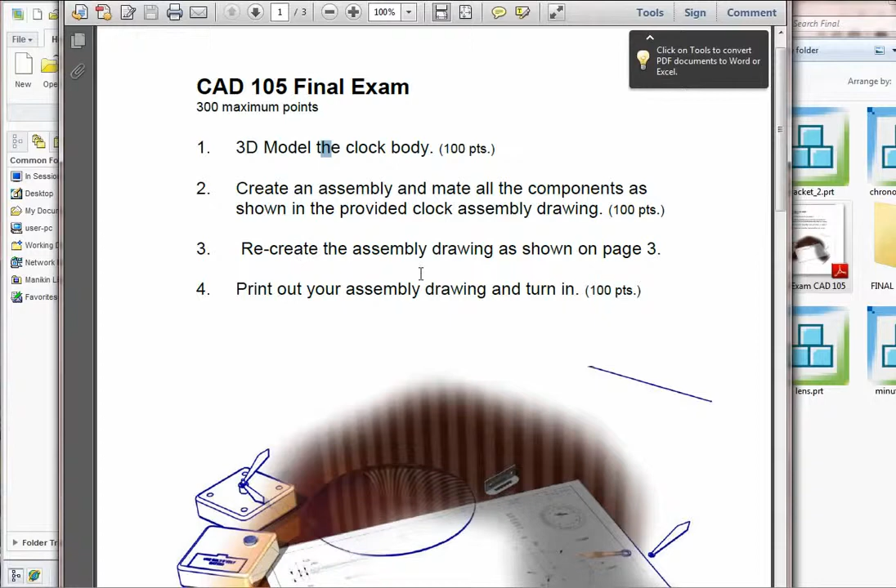The instructions are to model the 3D clock body with all points, create an assembly with all the components as shown, and recreate the assembly drawing shown on page 3. Print it out and turn it in. Here is the clock body. You can see it's a little more detailed than what we worked on in the past with our midterm, but nonetheless it's not much more challenging. There's just a couple extra things to do here. So we'll begin with that, then assemble it as shown and make this drawing.

So to start off, let's go ahead and create the clock body. The outer diameter is 8 inches, and it's going to be 0.75, so 3/4 of an inch thick. It'll have a hole that's a 1/2 inch diameter through in the center. Start with a new part, and we'll call this the clock_body.

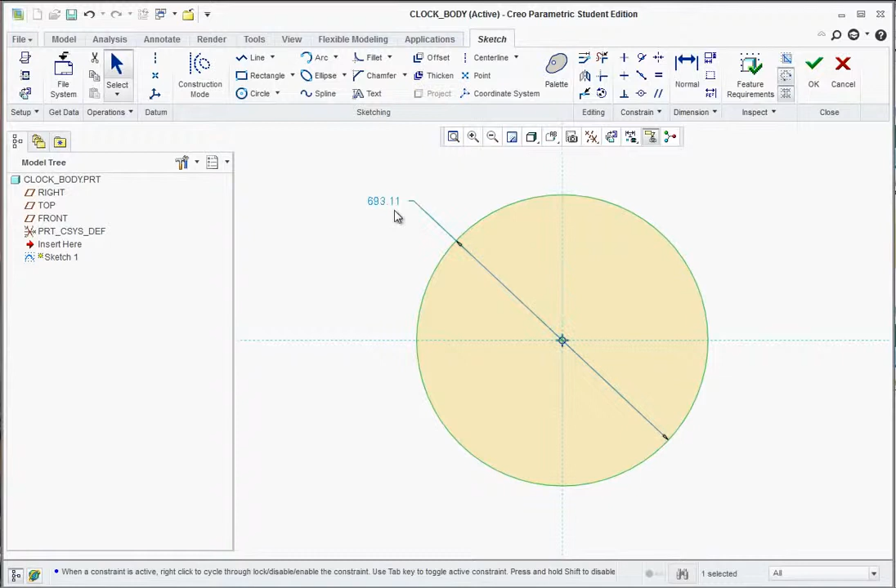Hit OK. Select the front plane for this one and start a sketch. Go to the front view orientation and proceed to sketch 2 circles. Go to the center and point circle. Draw out a large diameter there, and that's going to be 8 inches. Then draw a smaller diameter in the center, which is just 0.5.

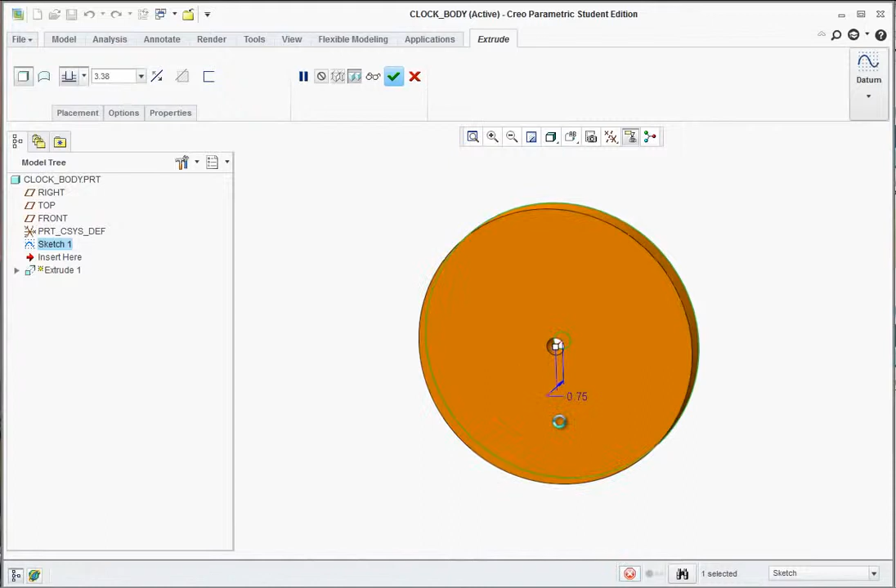Now you can extrude that, so hit OK. Go to Extrude Boss, refit here, and it only gets extruded 0.75 deep. Hit Apply. Right away, it's a good idea to put the fillet on, or the round. Click on the round, and the round is going to be 0.25. Select the outer edge, and apply.

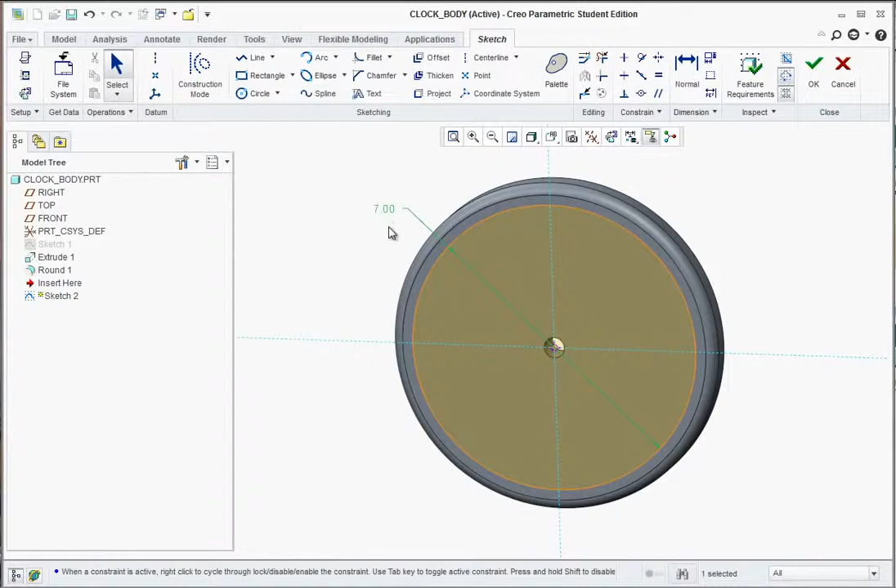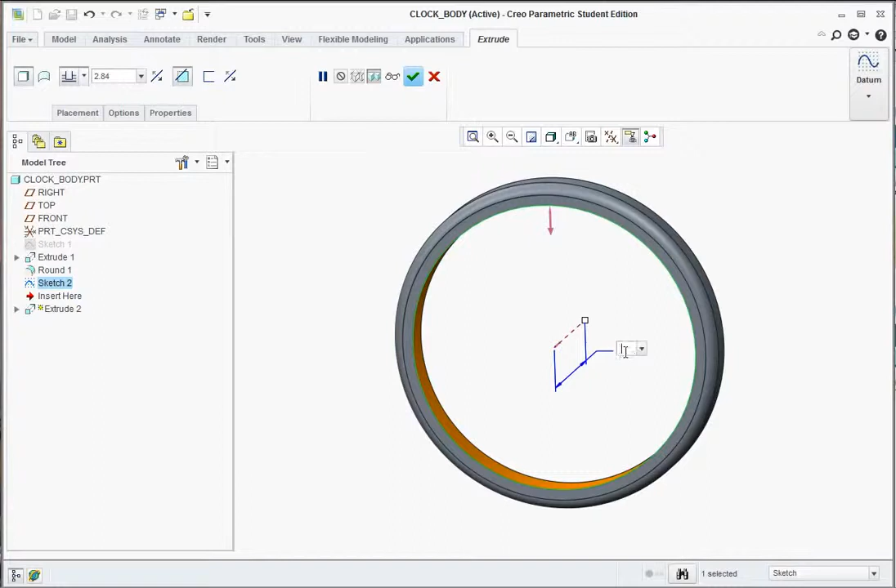Now select this face on the front and start a sketch. Draw the next diameter, which is 7 inches. That gets extruded as a cut. If we go to Extrude, reverse it, and we'll have to look at the print for that, and the print identifies it as 0.125 deep. So 0.125, and remove material. Let's try to get 0.125, hit enter, and have it update. And the green check mark to apply.

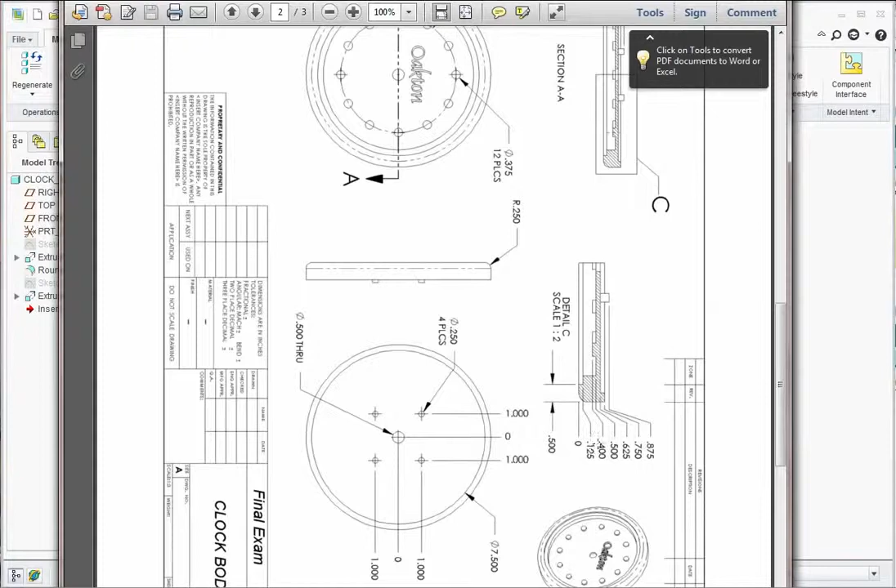The next diameter we're going to create here is going to be 6.5 inches. It's going to be another depth. In this case, from the 0 marker, which is the very front face, it's going to be 1/2 inch deep. Make sure it'll be 0.375 in the event that you have to subtract 0.125. To make things simple, I'm just going to go to Sketch and sketch on this little ledge right here, and draw my next circle, 6.5 from the center.

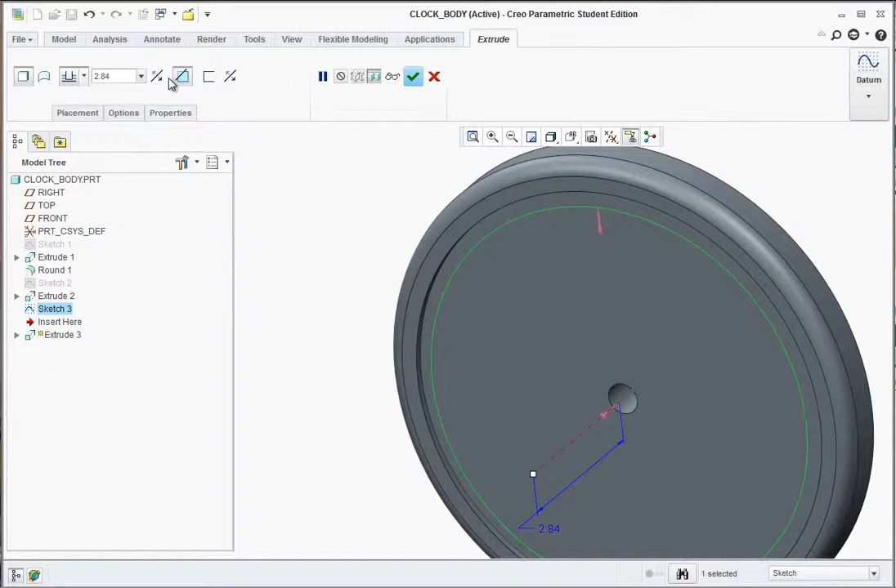Go to OK. Extrude. Remove material. Flip the direction. You could do that here. That goes 0.5 deep from this front face, remember. If you're sketching from the recess that's on there, subtract 0.125 from it. And hit Apply.

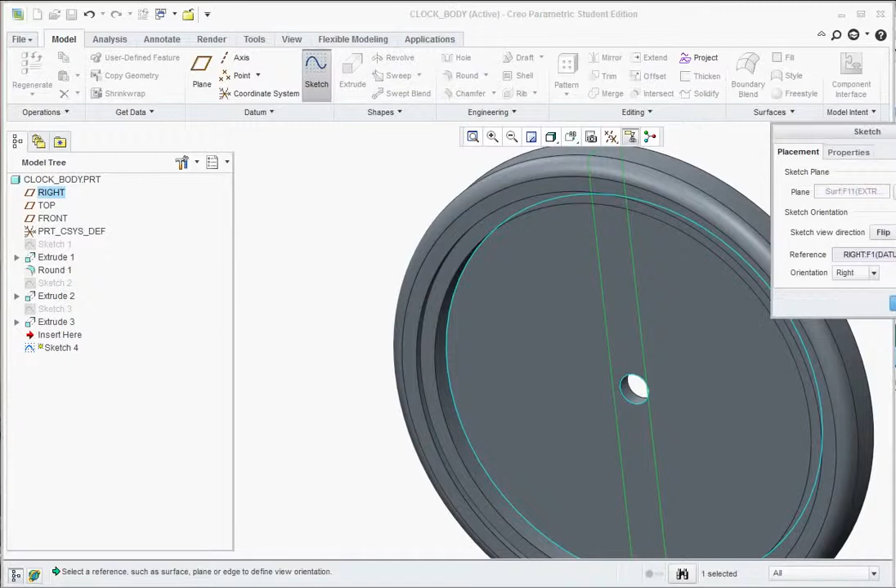Now we could go ahead and select Sketch and draw on this surface. I'm going to go to normal to the front, and draw a circle at the 12 o'clock marker. That's going to be 0.375 diameter, and it's going to be offset 2.5 inches from the center. Now you can hit OK and extrude that. It gets extruded only 0.1.

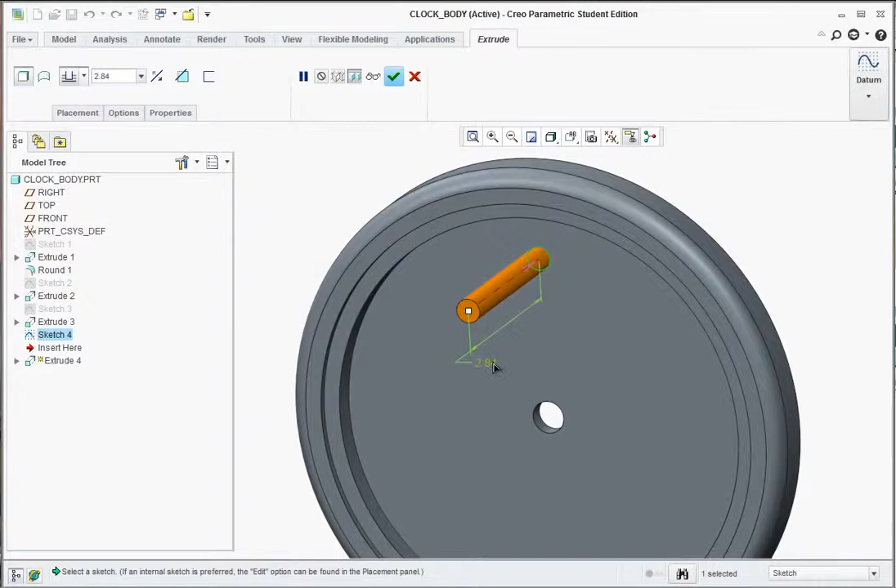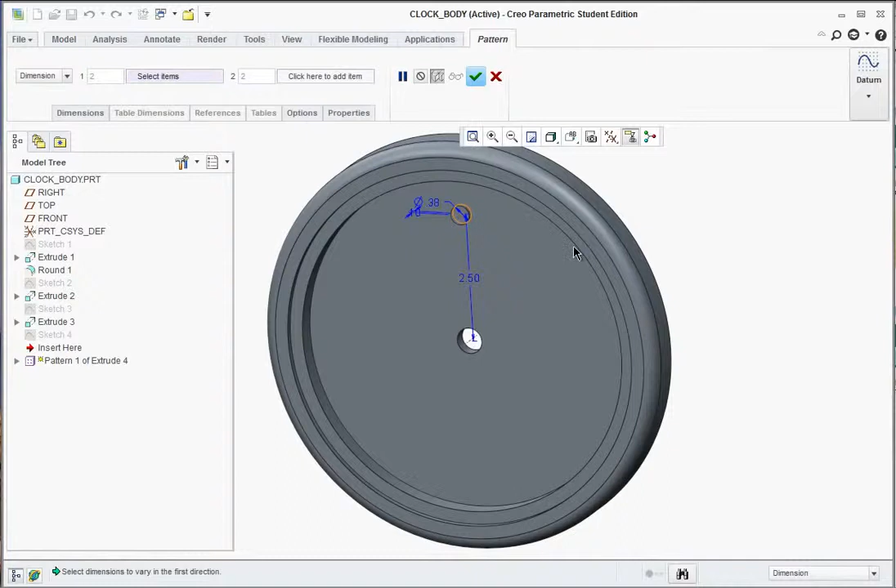Now we need to make the circular pattern. You're going to have to turn on your axis display. Now you could select this feature here and go to the pattern. Make sure that's selected. Go to pattern here and select pattern. Over on the upper left, make sure it's select axis, and select that center axis. There's going to be 12 markers, so it's 360 divided by 12. Hit enter, and it gives you 30 degrees. Hit the green check mark and apply.

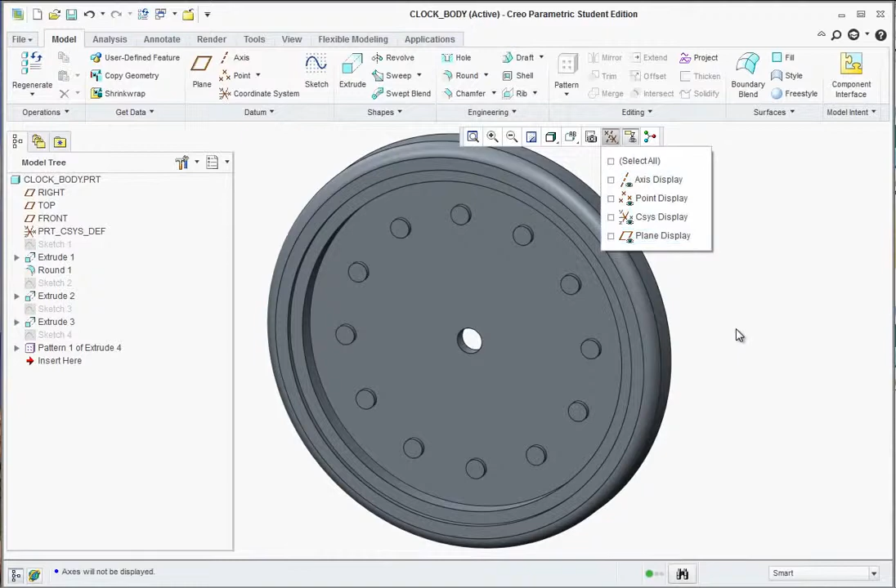At this point you can turn off the axis display. So now the front of the clock's done. Now the back needs to be addressed. For the back of the clock, we can see it's going to be 7.5 diameter, and it's just going to be 0.125 cut depth.

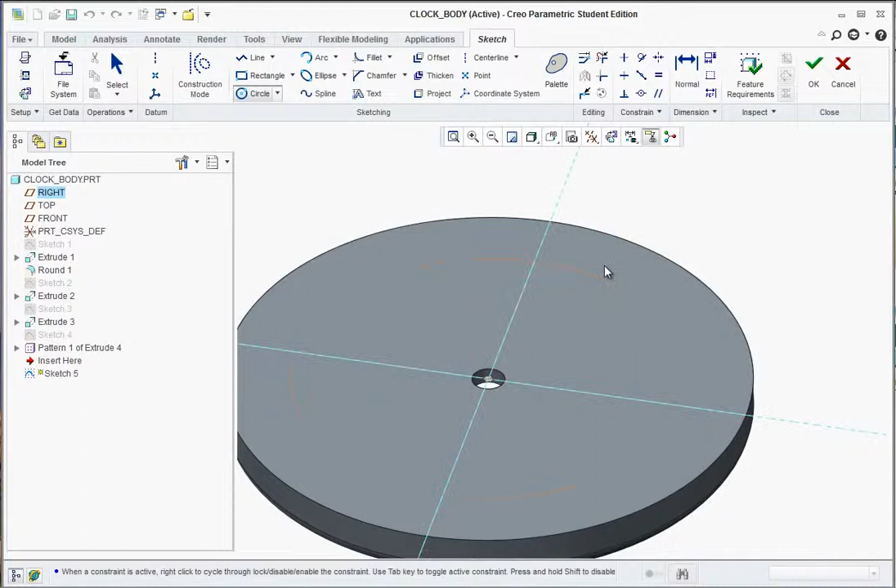So select sketch and select this back face. Start your sketch and draw the next circle at the center, and make that 7.5. Go to OK and extrude, reverse it, remove material, and make sure this is set to 0.125 deep. Hit apply. If it cuts through, that's an indication that you have one of your depths off.

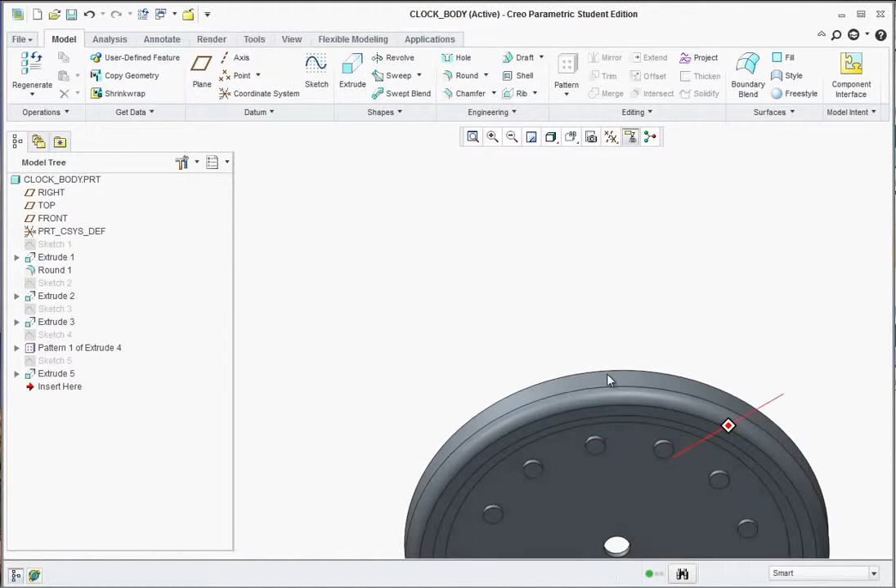Most likely it's that 1/2 inch deep for this level here, which you'd have to fix the extrude to by editing the definition of it and change it to 0.375 most likely. Now we need to select this face again and start a sketch on that pocket, that recess. I'm going to rotate here, and I'm going to select the centerline tool, draw off a vertical and a horizontal centerline. Draw a circle between those two and make it 0.25 for the diameter and 1 inch off each edge.

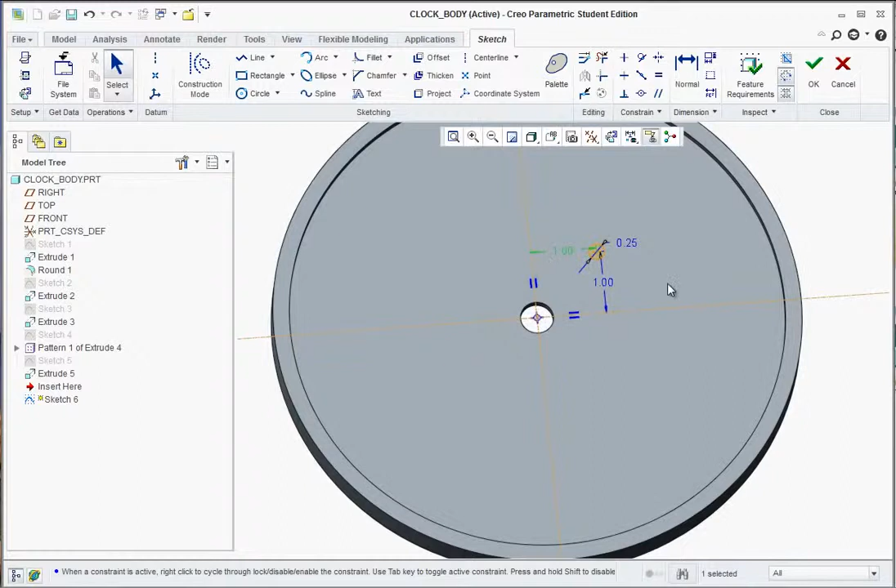Extrude that, go to OK, go to extrude, and that gets extruded 0.25 high.

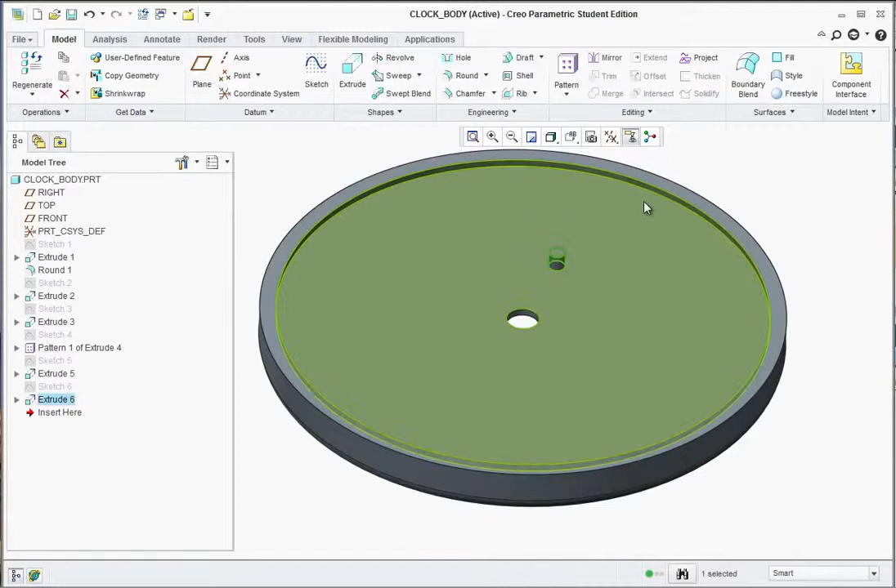Now we want to mirror that across. We could have used a sketch mirror as well, that would have been pretty easy. In this case, we just select the post, go to mirror, and you could select your right plane as a mirror plane and hit apply.

Click on both posts holding control. Unfortunately, let's just do one at a time. Let's see if we could just select the mirror. Go to pattern, not pattern, cancel out there.

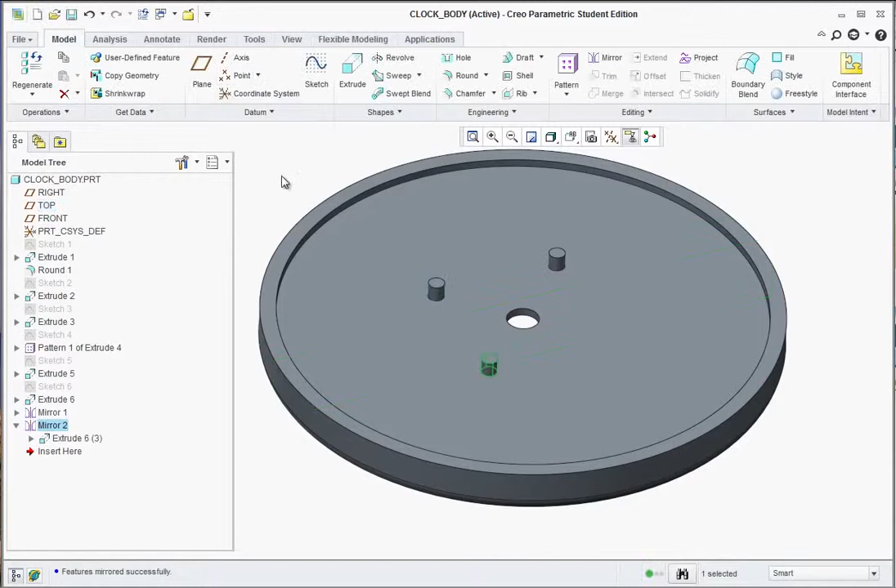Go to mirror and select the top plane. Mirror across. It's going to make us do this each one at a time unless we group them. But I'll go ahead and select extrude one there, or this one here. Go to mirror and I'll select the top plane for that one.

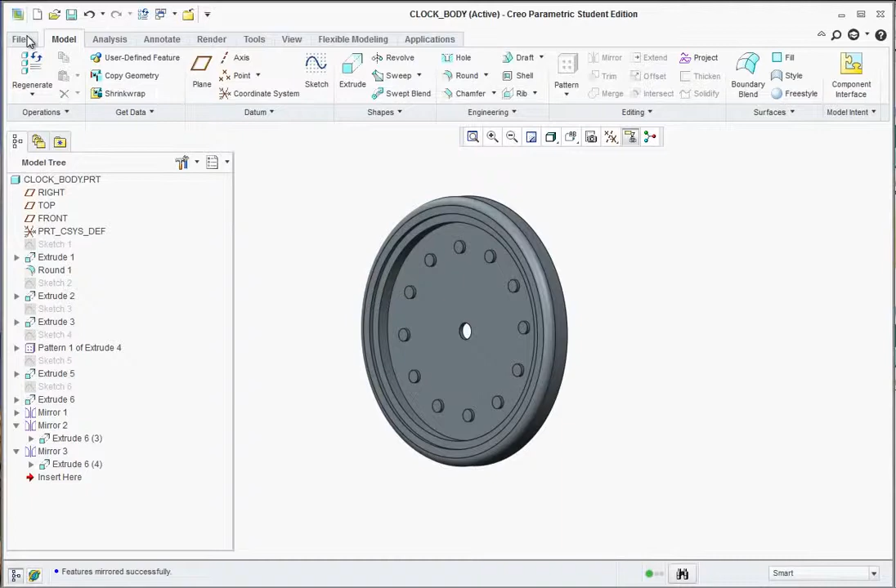Apply. Alright, the clock body is done. Let's move on to the next part, or the assembly I should say. Go to File, New, Assembly, and call it Clock. Hit OK.

Just going to refit this to the screen there. And now we're going to go to Assemble, and we should be able to see the clock we've been working on. It should be found in Session. Click on In Session and find the clock body. Hit Open and set that to default. Hit the green check mark.

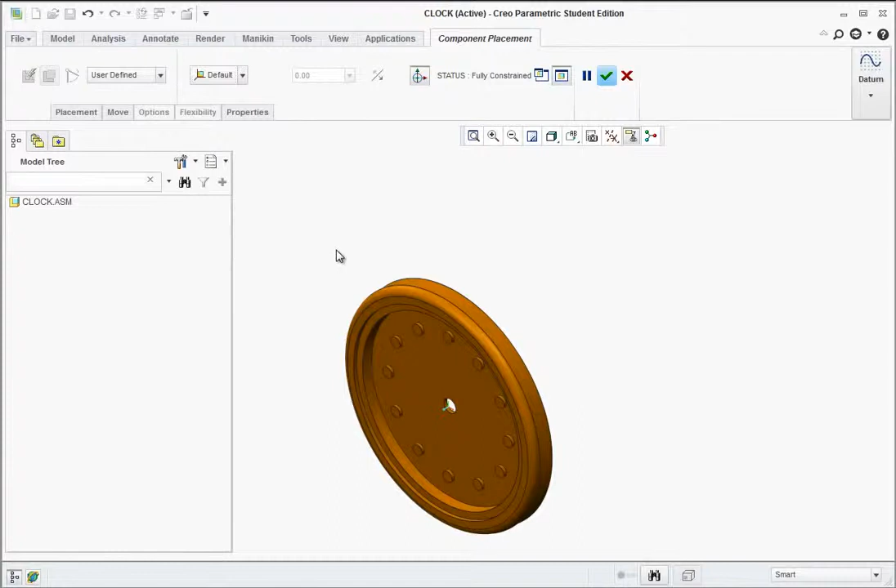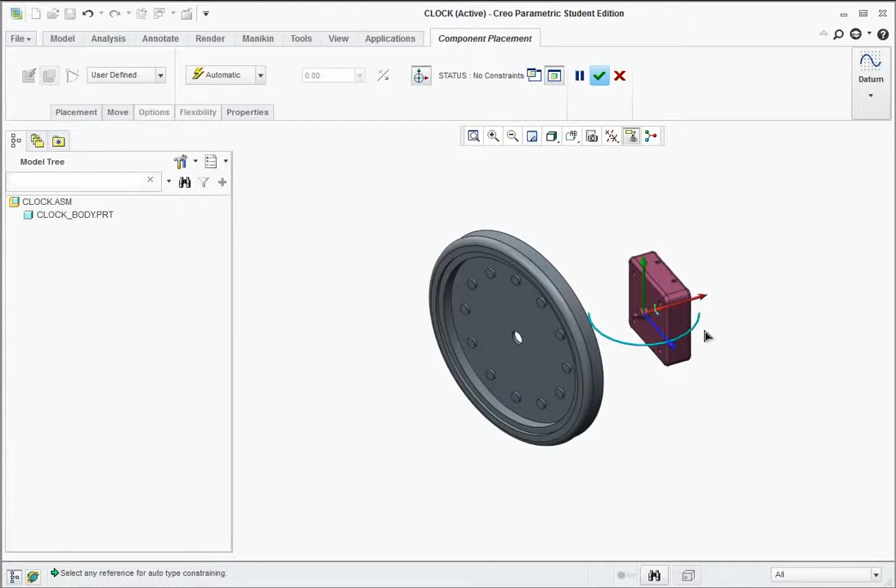Now we need to assemble the other components. So go to Assemble again, and this is where you're going to have to browse for the sample files and Final folder and find the chrono housing. Hit Open. Now using this, you could grab these manipulator handles and get it close and even rotate this around so you kind of have it in position ahead of time.

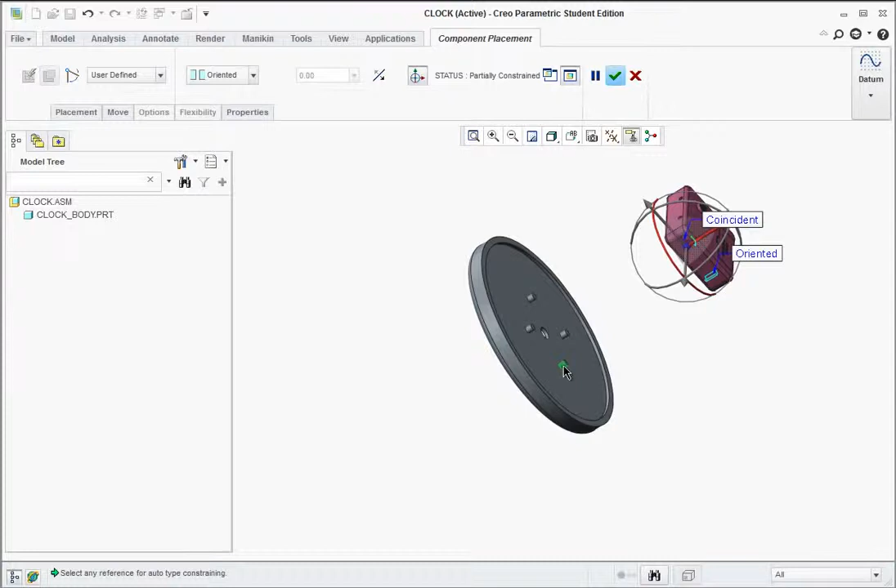And now you could select this cylindrical face here to this hole. Align that. Then this face here, hit refit if you have problems with rotating out of the screen. And then to that post on the lower right. And then keep having to rotate. Unfortunately, it's not refitting very well here.

I'm going to select this face to select that face. Now, instead of distance, I want that to go coincident. So let's mate up against there. Let's go to the standard orientation here.

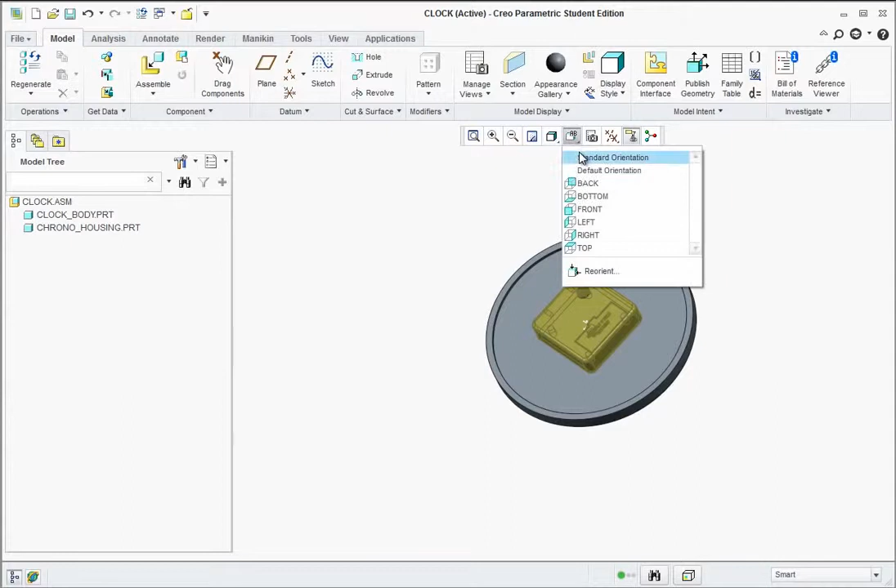Okay, now we could go ahead and make sure that the post holes are on the top, so you're in good shape, and you can continue adding components. So go to Assemble, let's bring in the bracket, hit Open, and again, we can move this to the back where it needs to be.

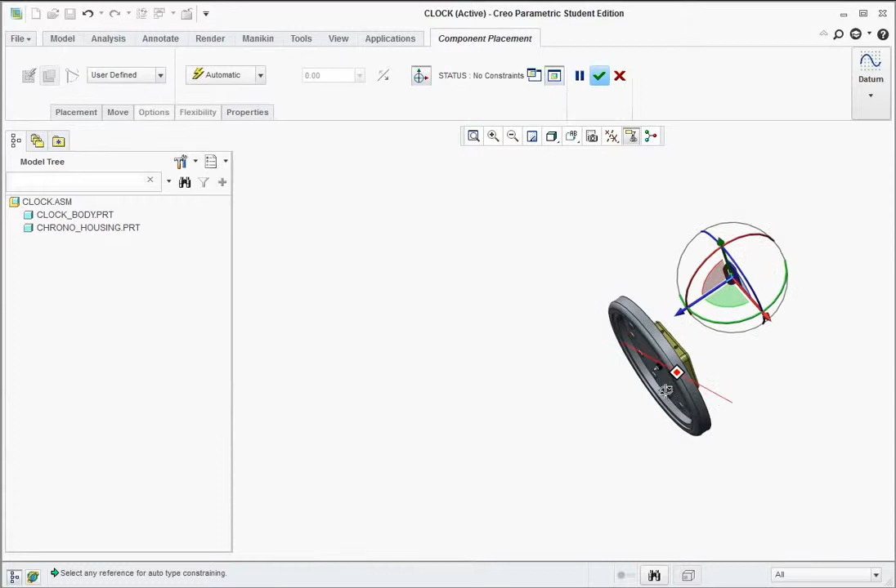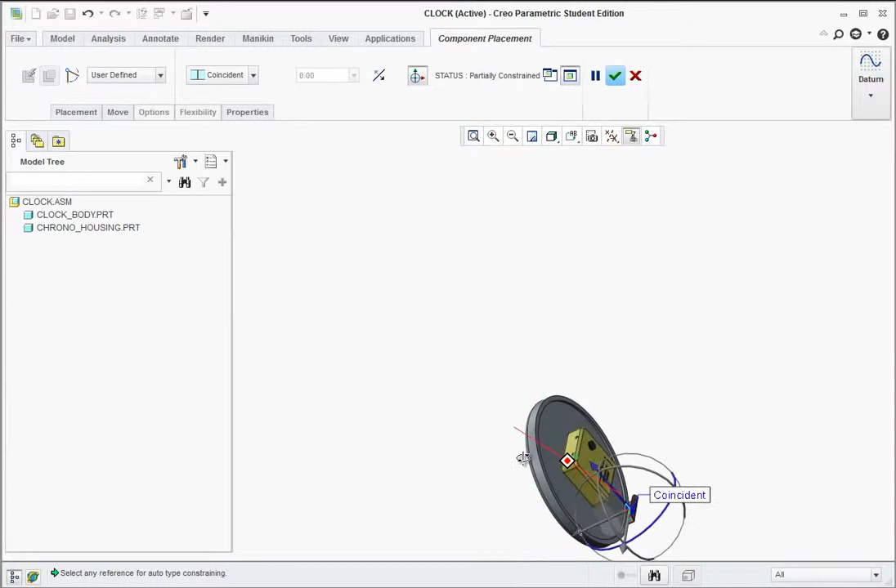Okay, and I'm going to go ahead and rotate it around, grabbing the little rings to get it kind of close to the same way I need to have it over there. And I could select this face here to this face. Now if it's in the part there, we could just grab the manipulator handle, drag it up, and zoom up, and now we could select the underside face and align it to this face.

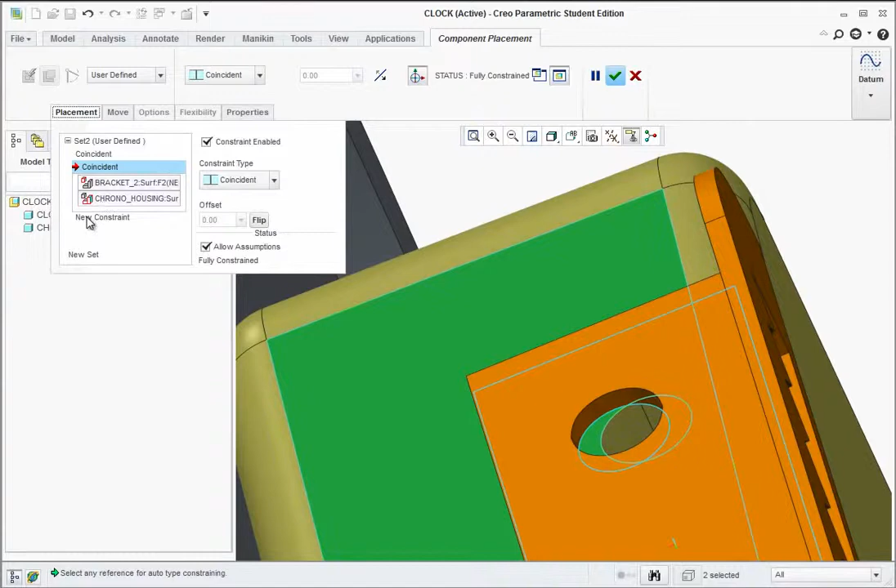And finally, this hole, oops, unfortunately grabbed the wrong face. Let's go over to placement. Let's go to new constraint, this face to this face, and apply.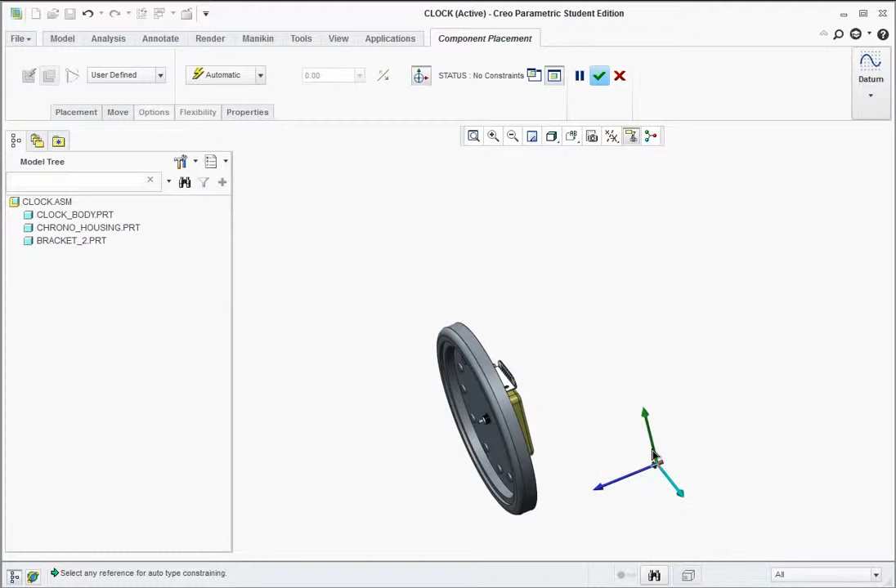At this point, we're going to go back to assemble, and we're going to bring in the bolt. Open, and move the bolt over. Close in proximity to the hole. Now we can select the length of the bolt. And actually, we'll rotate it somewhat closer into position, and then select that hole there.

Okay, we've got to bring it up. Now rotate this around, select that underside face of the head of the bolt to connect to this top face here, and hit apply.

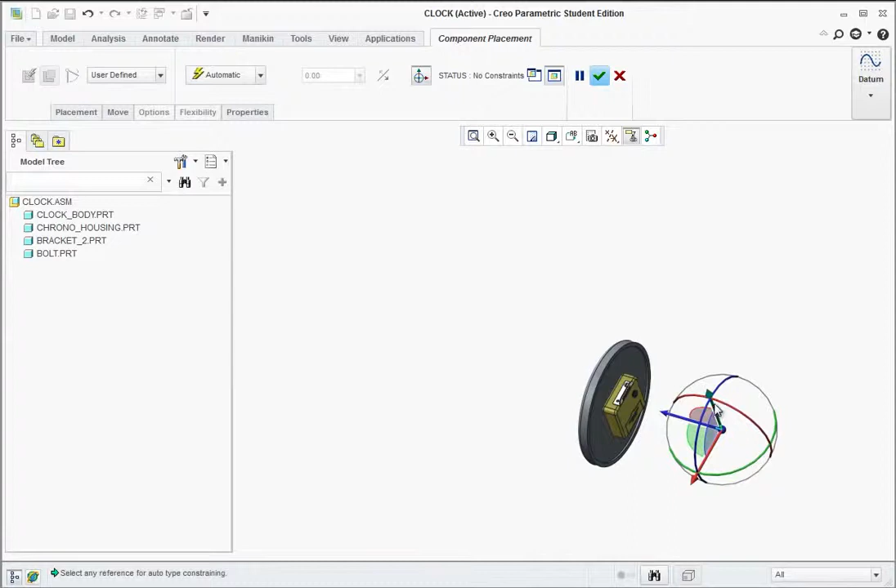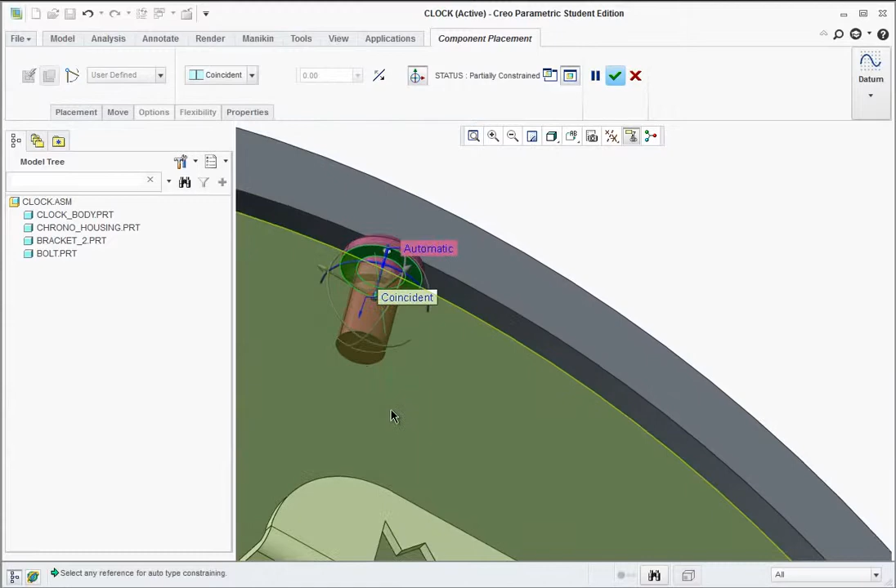Let's bring in another bolt. Assemble, bolt, hit open. Again, get that close in proximity to the assembly and where you want to drop it. Rotate it. Select the length of the shaft to the hole. Get underneath that surface to this top surface of the bracket. Hit apply.

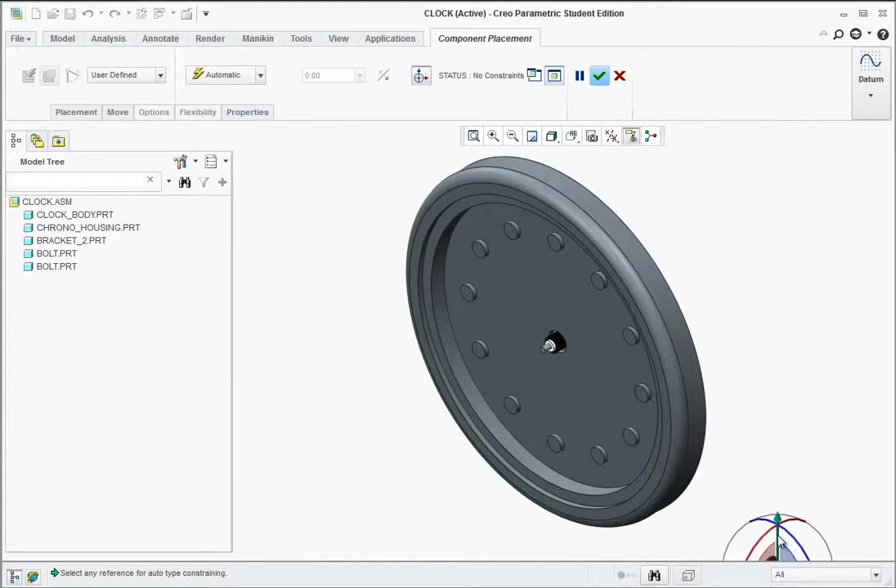Go back to default orientation, and now we'll bring in some of the other components. Assemble, and let's bring in the hour hand. Could rotate that a little bit. Bring that up. And same thing: select the hole here, and then select the white sleeve.

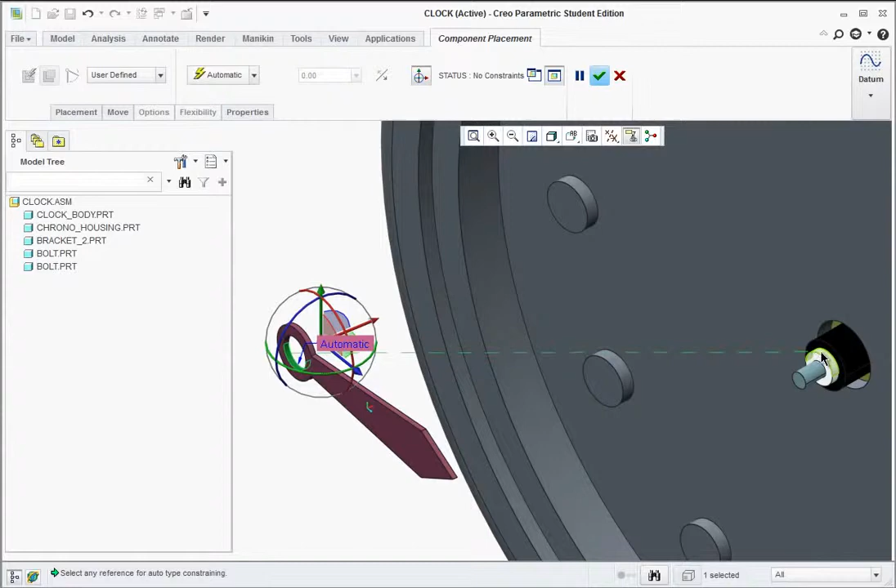And then you can select this backside face. Remember, you could drag it out if you need to. And then the black sleeve surface here on the flat one. Apply. Proceed to bring in the minute hand now.

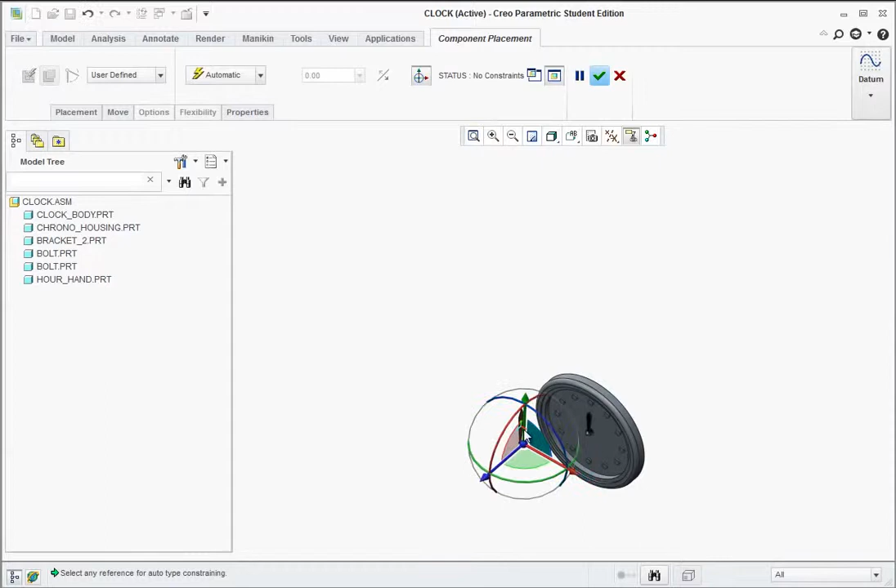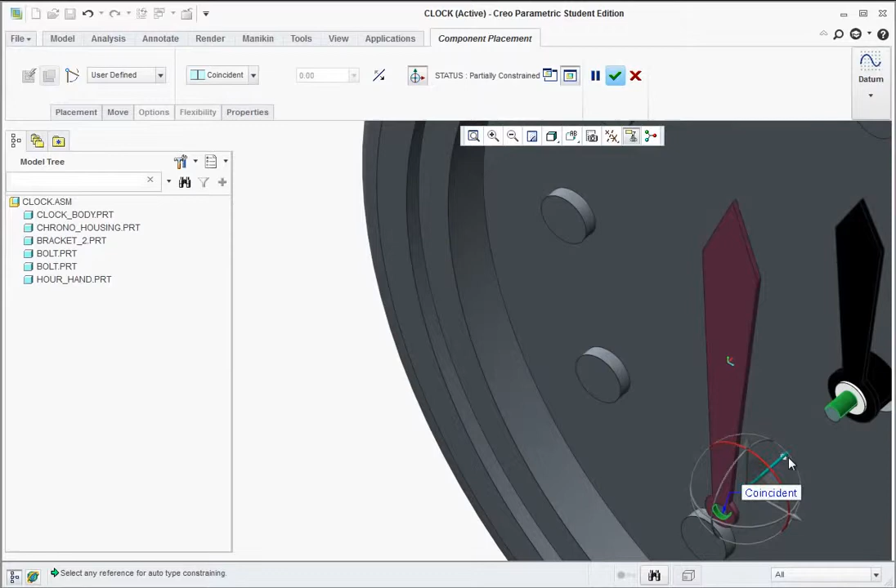Again, get it close. Rotate it around a little bit. Select the hole and select the gray sleeve. Let's drag this out a little bit, and maybe out a little bit further, so we could rotate and get that backside surface.

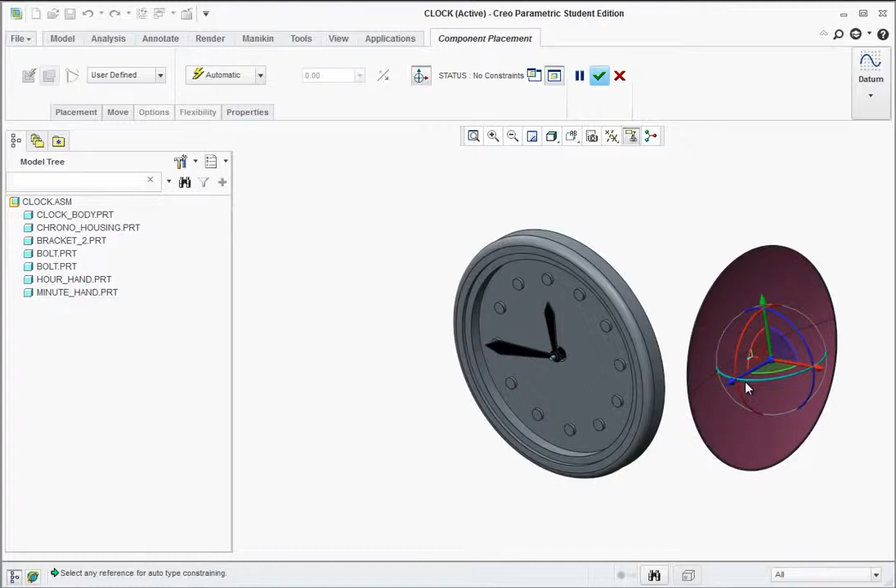And we want that to go coincident to the white surface. Hit apply. And now for the lens. Assemble, find the lens, bring that over here. Rotate it around a bit.

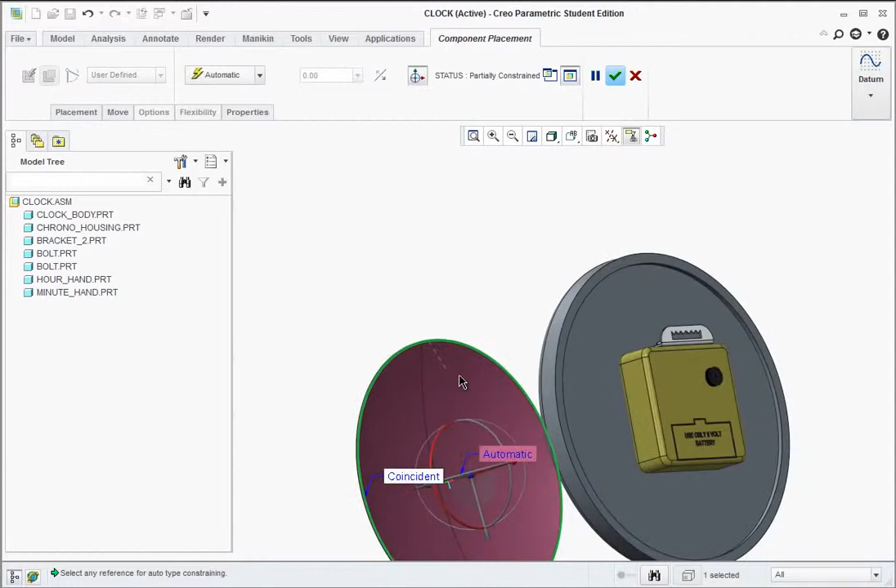Select the cylindrical face of the lens to this face here, and then this flat face to the flat face on the ledge. Make sure that's coincident.

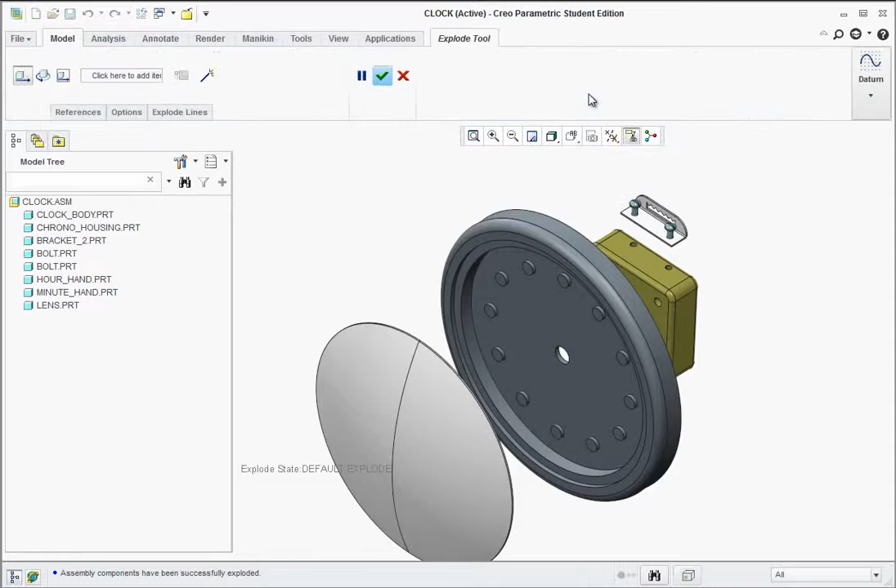Now we're going to explode this. For explode, it's right up here. Click on Explode View, and then down below there's Edit Position. Click on Edit Position, then select the part you want to move, and it gives you a manipulator handle so you can drag it in any direction. If you want to select more than one object, hold Control and drag them out as a group.

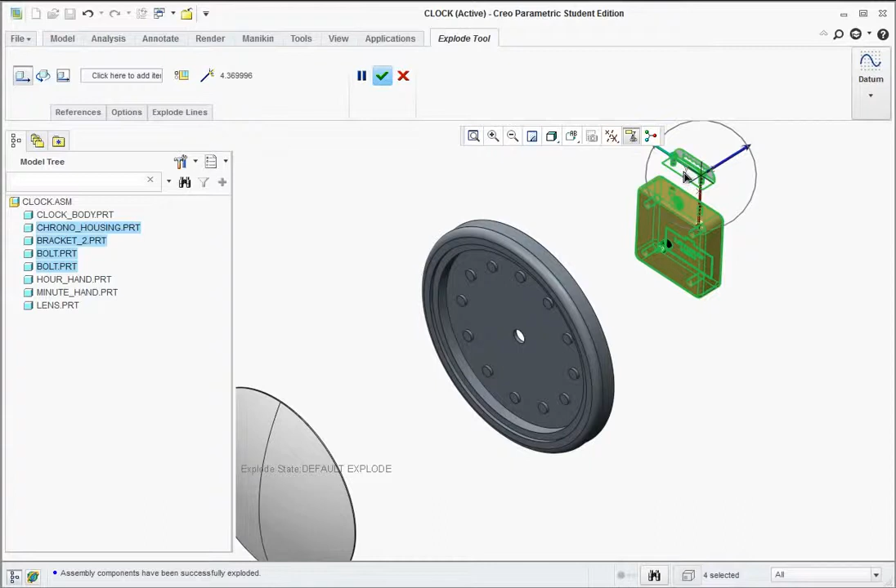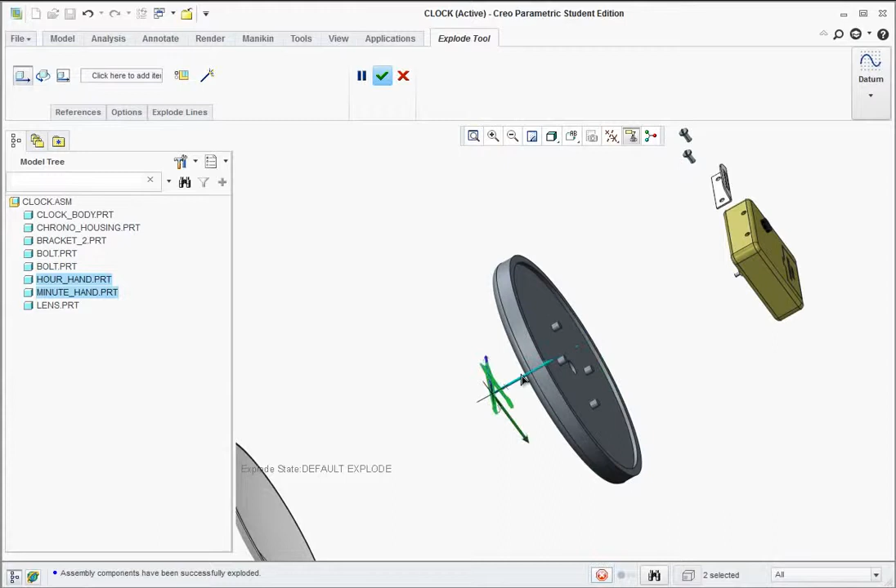Drag that up, click on the bracket and drag it down, and make sure you bring out the hour and minute hands. Move those out and then split them up so they're not touching.

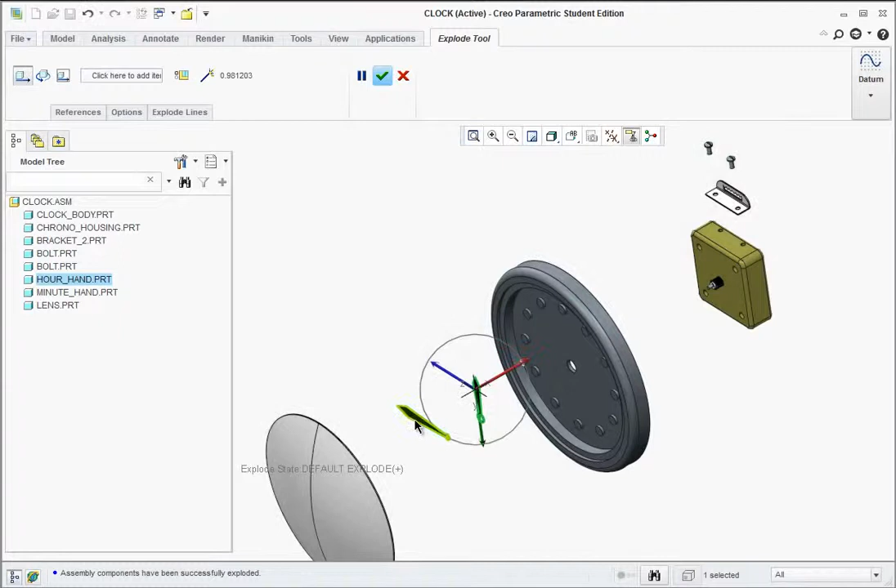Then you could click Unexplode View by clicking on Explode View again. Okay, so the assembly's done. That's worth 100 points, so we're on the last leg of this.

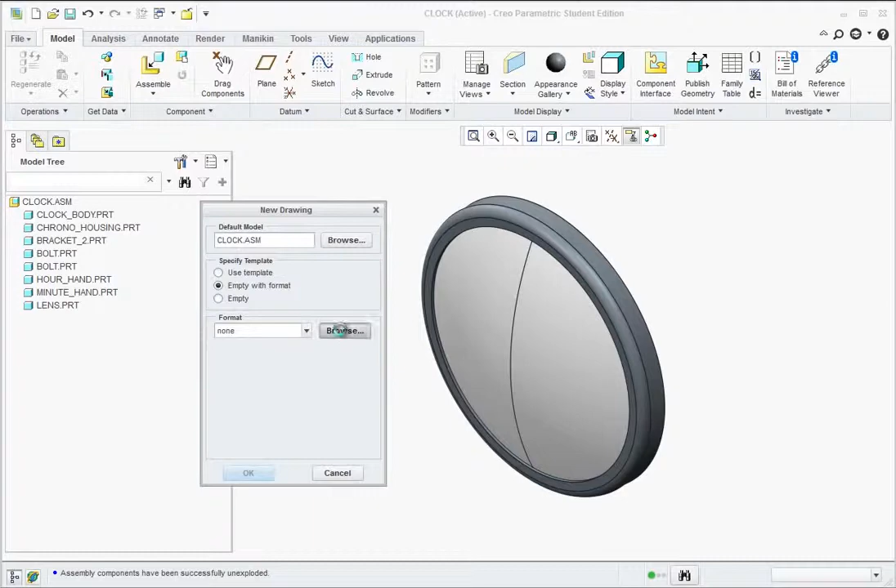Let's go to File, New, Drawing. Call this the clock, hit OK. You could go with Empty with Format and browse for the A format.

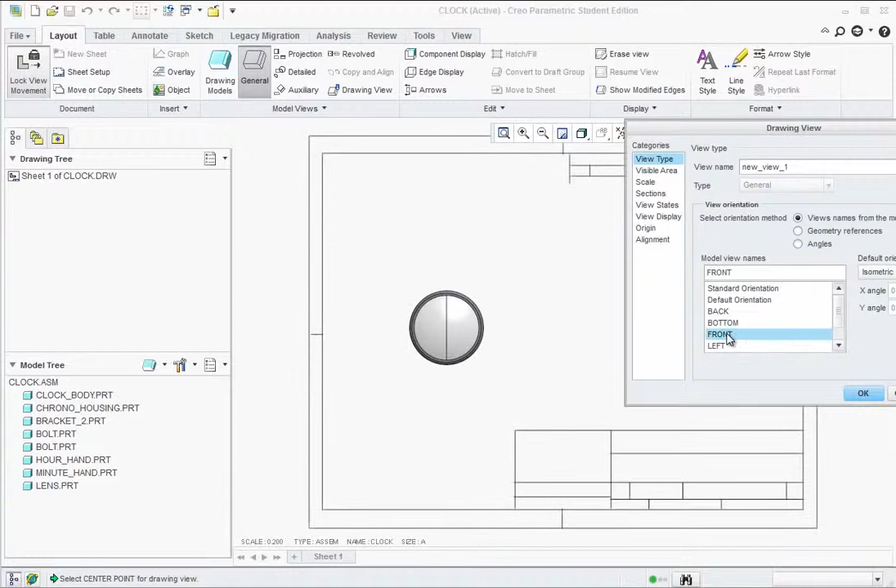At this point, go to General, hit OK, left click to drop in the clock, and let's bring in the front view orientation. Under View Display, make sure No Hidden with Phantom Lines for the tangent edges is turned on.

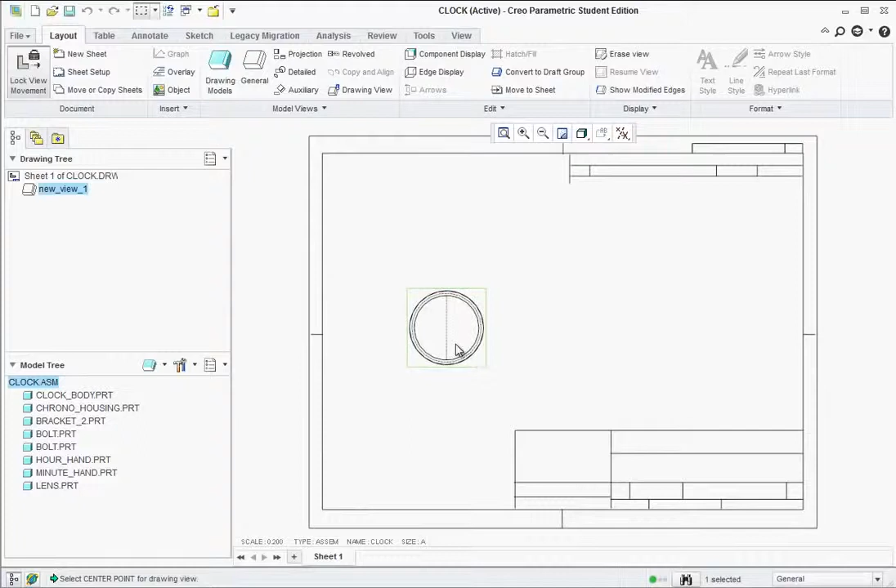We could also adjust the size, although I think it actually works really well. If we go to Scale, 0.2 is good. Hit OK. Now if you need to move the view, remember you have to turn off Lock View Movement, then you could click on it and relocate it.

If we look at the drawing, what you need to do here, I'm going to go ahead and rotate this view. We need to recreate this drawing, so we have a front, left, bottom, section, detail.

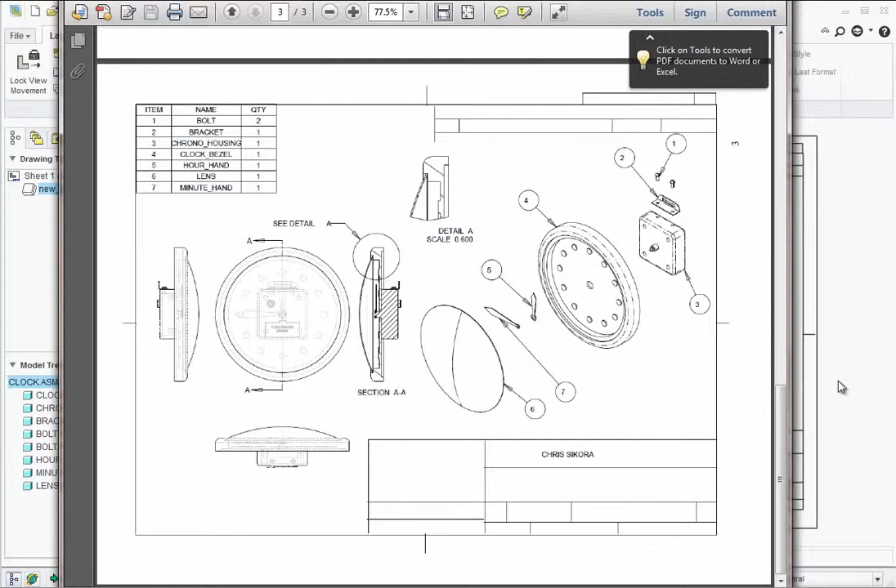So there's our front, click on it, go to projected, left. Click on this again, projected bottom. Click on projected again, click on this, right, and now we're transforming these.

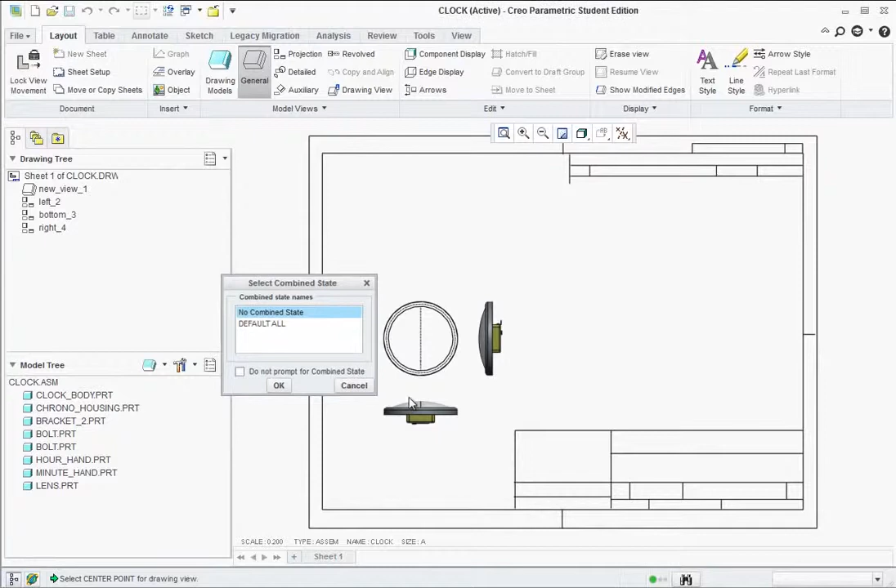Also let's bring in a general view again, hit OK, left click over here, and we want the exploded view. So if we go to View State, click on Explode, and View Display, just hit Yes, and make sure it's set to No Hidden, Phantom Lines, and hit OK.

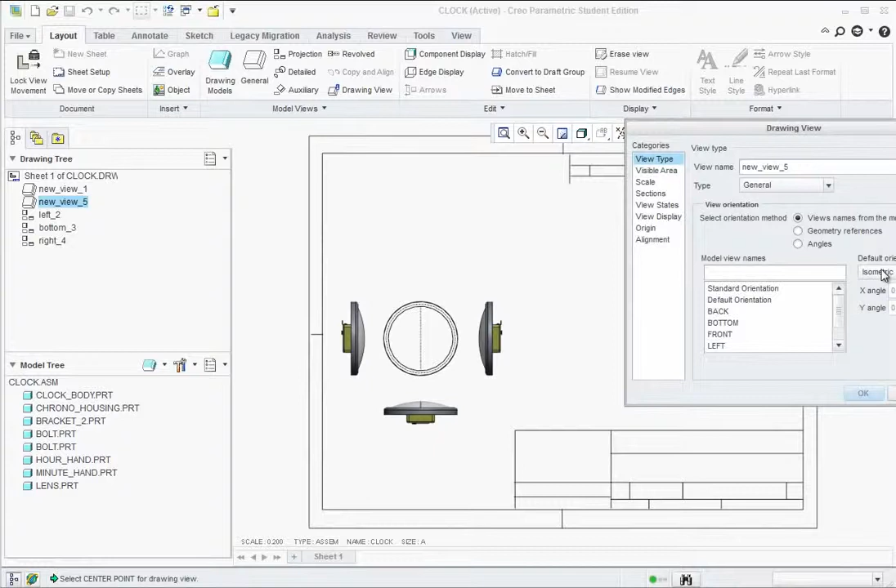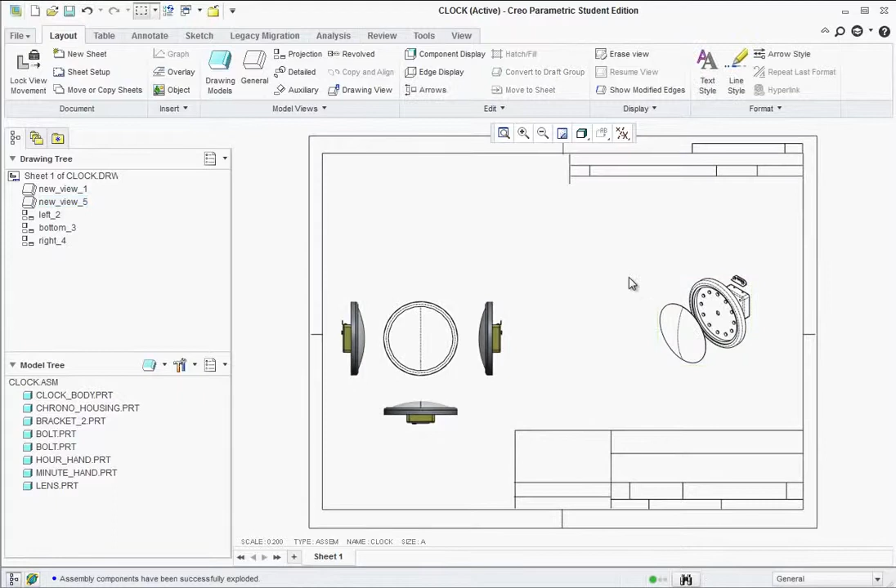In this case, I actually forgot to save my exploded view. So we can customize it from here, but my suggestion is actually not to. So what I'm going to do is go back to that, and I will fix that in just a second.

Anyway, with these views, we could hold Control and select these views, then right-click and go to Properties, and we could set them all up to look the same. So no hidden, phantom lines.

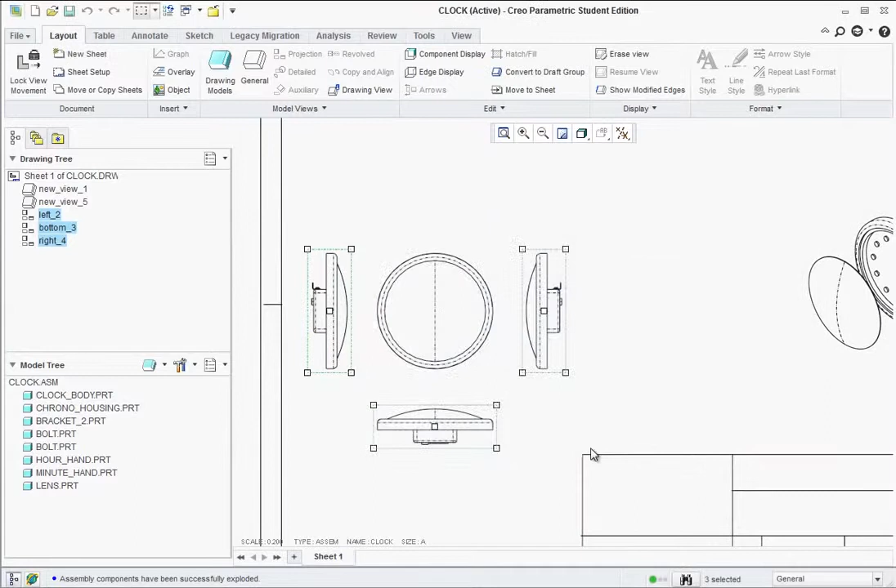Hit OK. Let's make a section view right now. Actually, this one should have none for phantom under View Display. And actually, these do have hidden lines, I forgot about that. So these three.

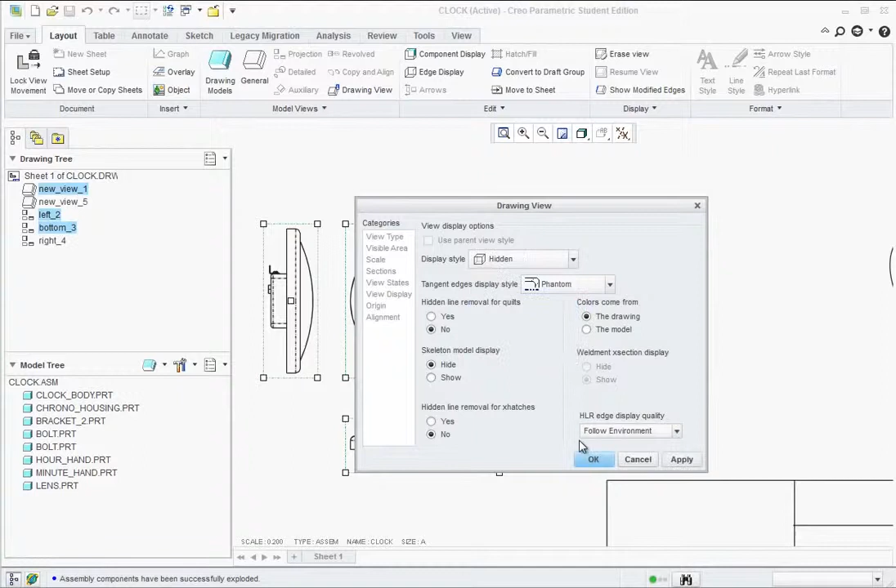Right-click Properties, and you do want hidden. Okay, now to make the section view here, double click on this view, and we're going to go to Sections, 2D cross section, Add.

And here's this little box that comes up here. Just hit done, type in A for the label, and then over here it's looking for a plane.

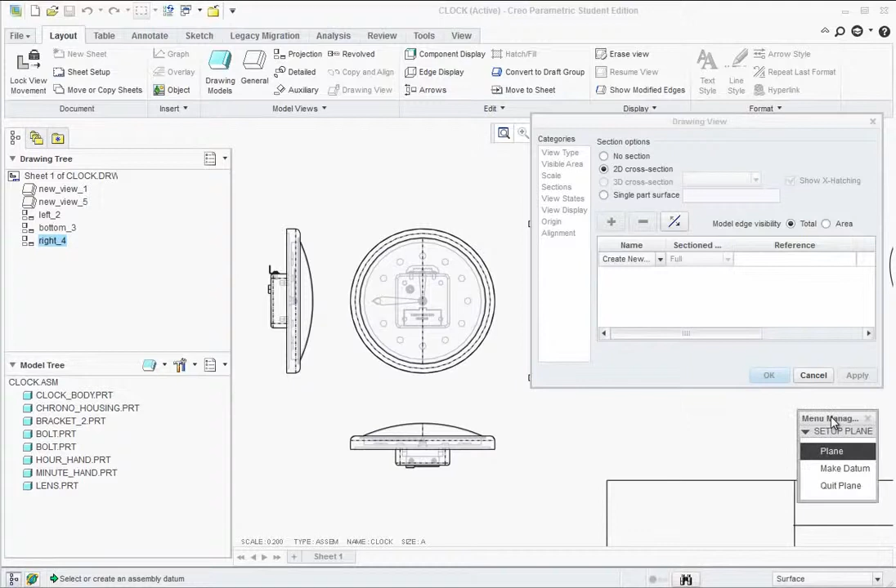This is where you could turn on your planes. Click on this little button here, turn on plane display, and refresh the screen. So here's refresh, and now you just select that assembly right plane right here down below. Click on the text and hit apply and close.

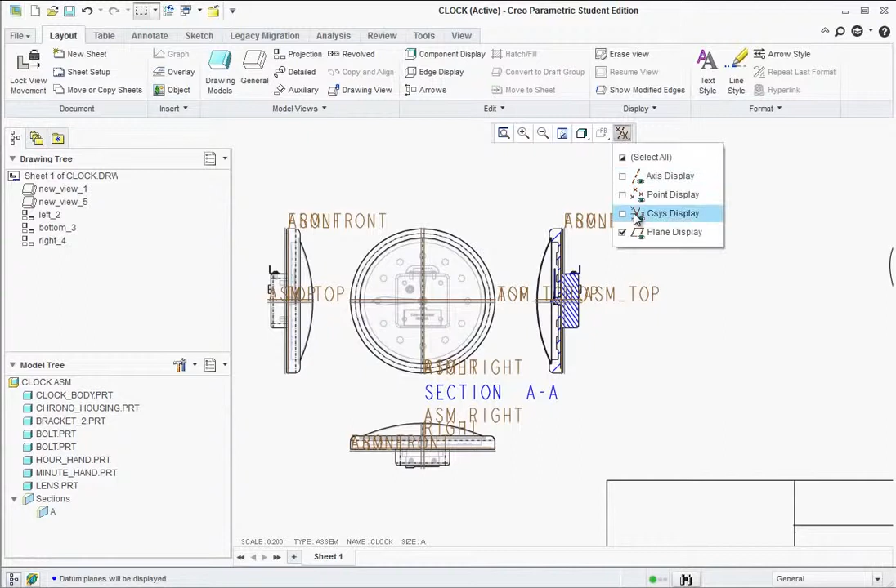Now we could turn off the plane display again and just zoom out or refresh the screen, and there's our section view.

Make sure you add the section view arrows though. Right click on this view once, then right click and add arrows, then click on this view to add the arrows to it. You could at this point click on the arrowheads and drag them in so they're not overlapping on any other geometry.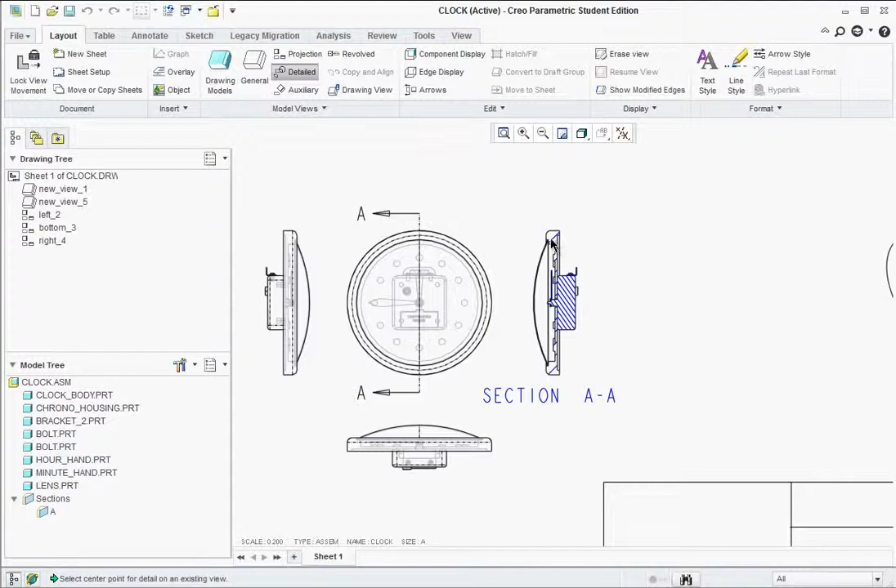Now for the detail view, go to detail, click in this corner up here at the top, and drag a circle around it. Actually, you're drawing geometry. Middle click, and then left click to drop the detail view. Make sure you center the text, and make sure that this isn't overlapping any.

We'll go ahead and finish this off, then we'll address this issue. Let's click on this view and go to Table.

Unfortunately, I won't be able to reproduce this here because this is not the same license agreement we have at the school. But what you're going to want to do is go Table from File, and you should find the BOM table located in that sample files folder. You click on that, hit open, and it will drop in the upper left corner.

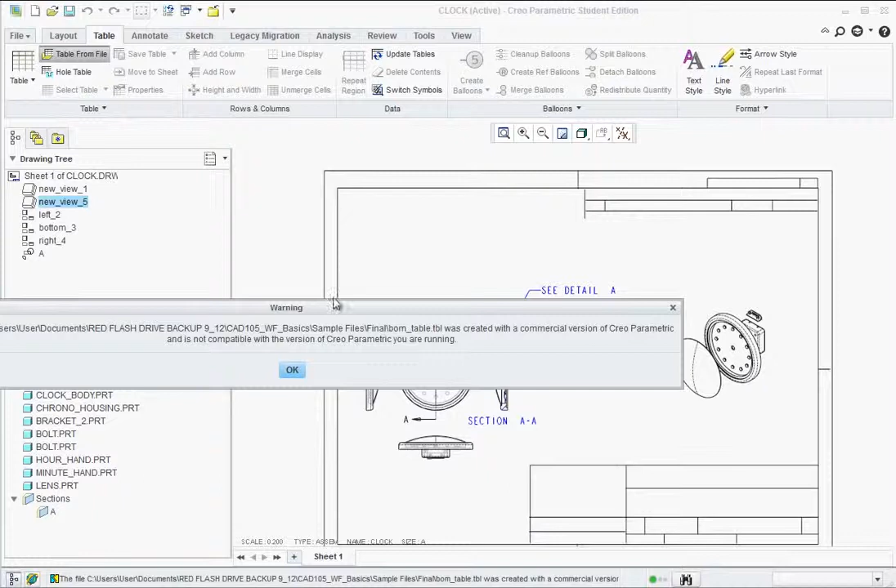You'll get this message on the home license, unfortunately, because it was created on a commercial version at the school. Hit OK, and unfortunately I won't be able to bring that in and simulate it here, but that would bring it in. You could click on it, right click, and change the column widths and height.

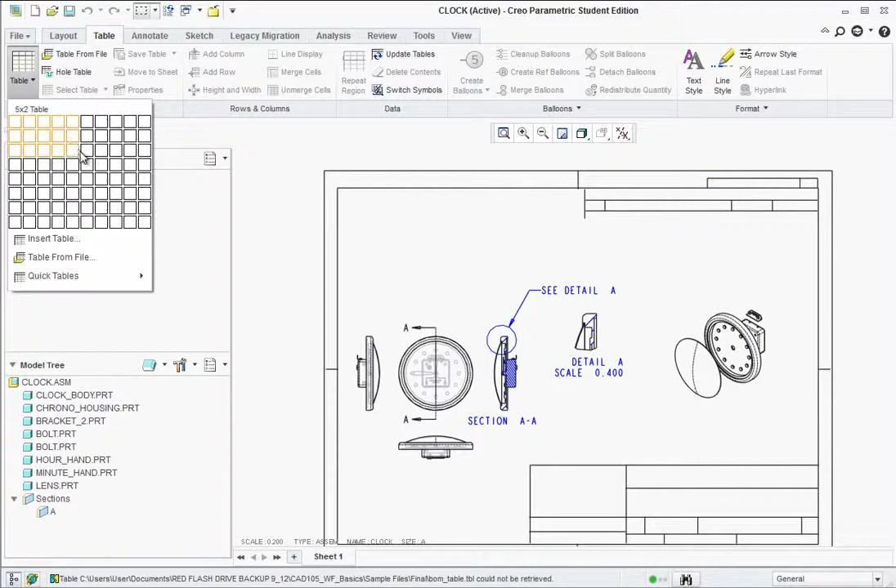Just to show you what you can do with it, like if it comes in rather large, while it's still all selected, you just right click on any cell and you have height and width options.

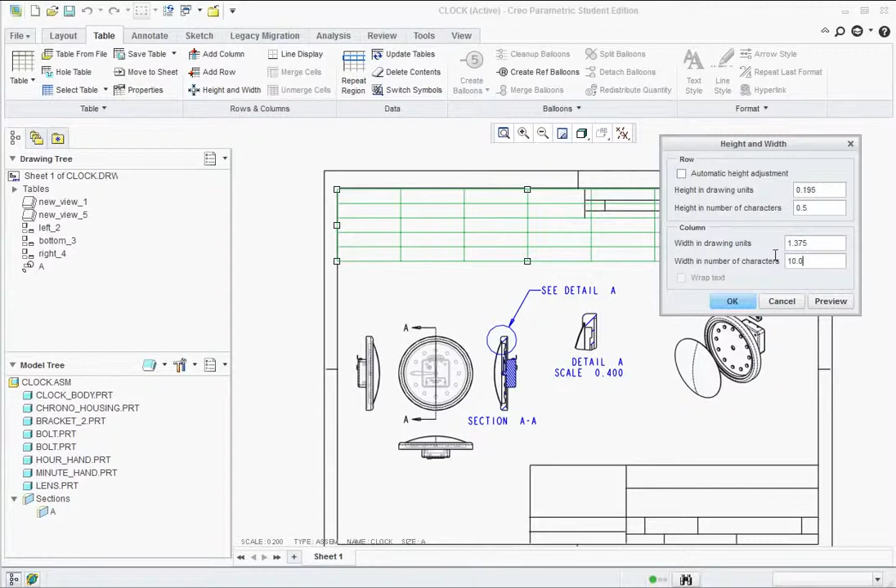You could go in and turn off the automatic height adjustment, and put in the height, say 0.2. That will bring down the size of the column a little bit. Number of characters, let's say 6. Preview it and you see how it gets smaller, so you're able to transform it to make it fit properly.

The table from the file will work just as well.

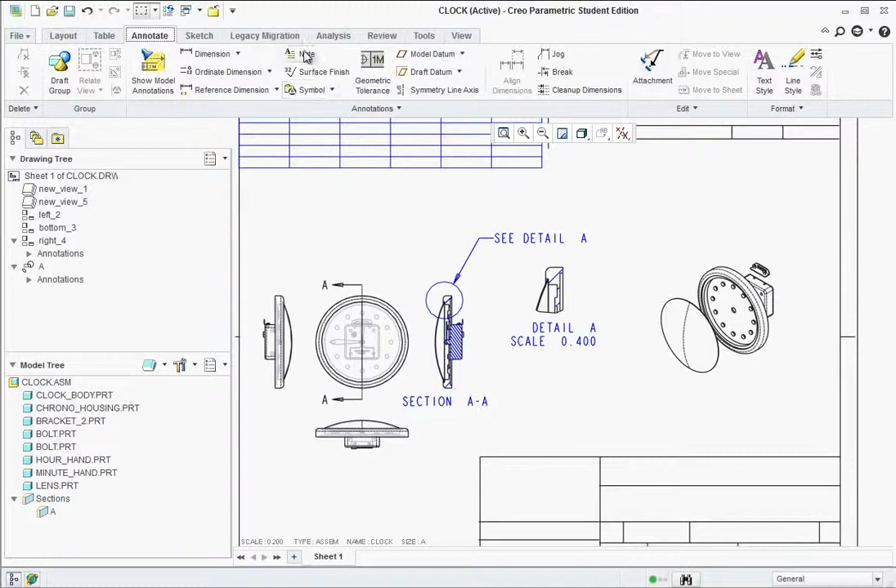Okay, now we'll put in a note here. Let's go to Annotate and go to Note, and just hit Make Note. Click in this little area to drop the note, and up here you just get to type your name. Then hit the green check mark twice, and it should drop in. Then hit Done and Return.

Okay, now we have to address this assembly. If you right click in the view, or just go up here, this little button allows you to go back and forth between the different files. So we want the clock assembly, click on that.

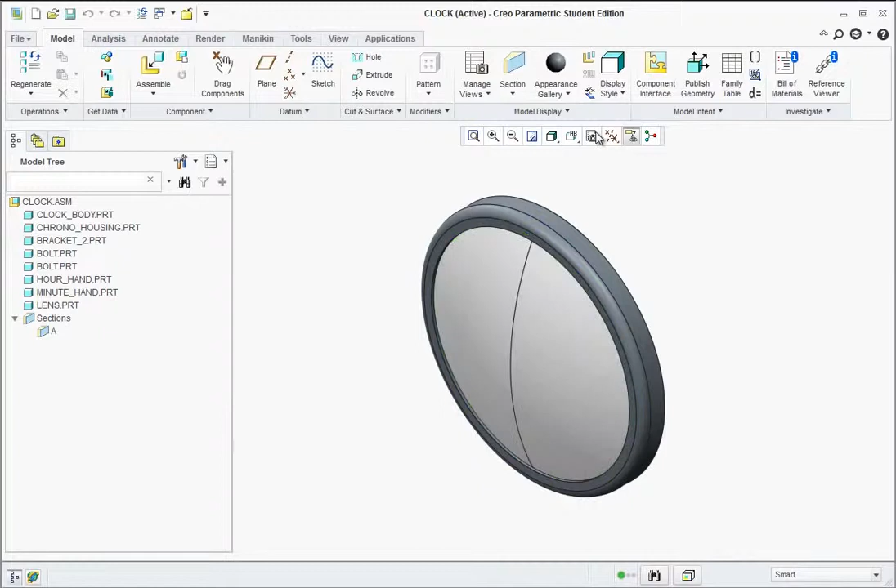And we want to go back to Explode. As you can see, it didn't remember our explode, so we'll go back over here to edit position and drag this out. Actually, there it goes - it did retain some of that. So I'm going to hit the green check mark.

Now what you need to do is take a picture of that. The View Manager allows you to do that with this little camera. Hit the camera, and over here we go to Explode and hit New. It'll say Modified, do you want to save the default? This is going to actually transform this as our default, so hit Yes, then just hit OK, Update Default. At this point you could actually hit Close because the default Explode now took over. If you wanted to add additional views you could, but that's all we need.

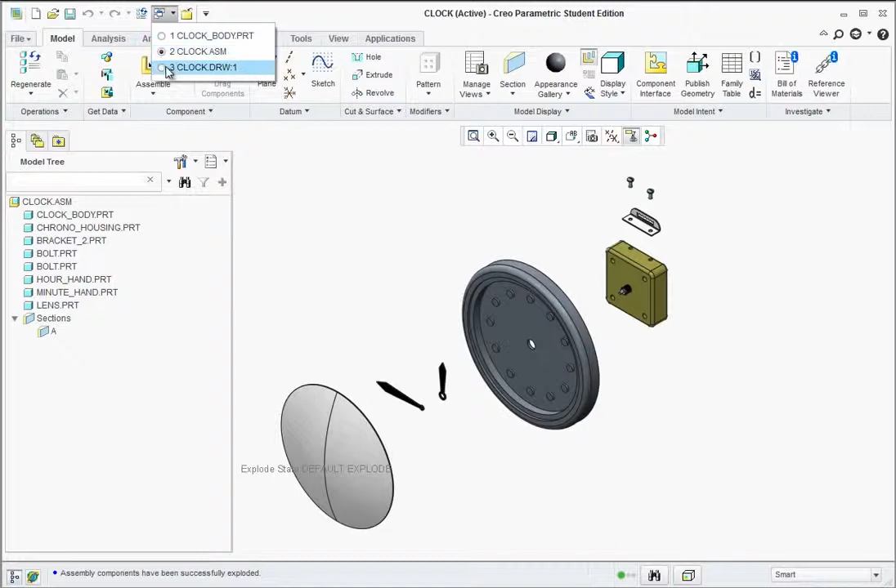Now we could go back up here to the clock drawing, and it should update the view.

Now the balloons - normally you have the BOM balloons in the table, and you'll be able to click on this and it will create the BOM balloons automatically for you. But here, you don't want to create reference balloons. We could go balloon note and put them in, or I can put them in manually. I'm just going to show this to you, but basically you would be able to bring in the balloons from the BOM.

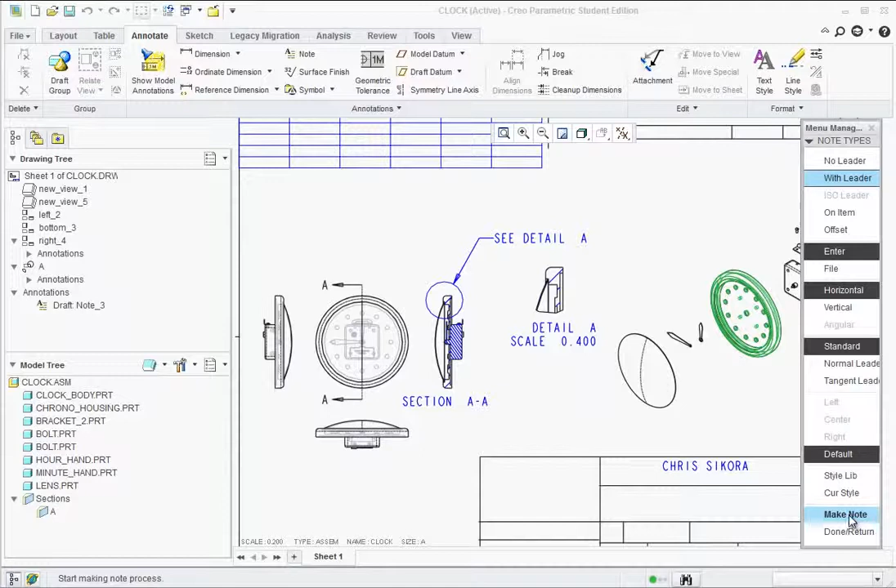Okay, if I go to Annotate, I could just add them manually here. There's balloon note, and I want them with the leader. Hit select, make note, select an edge, hit done, click where you want it, and I'm going to call this the clock, number 1. Green check mark twice, and it should create the note.

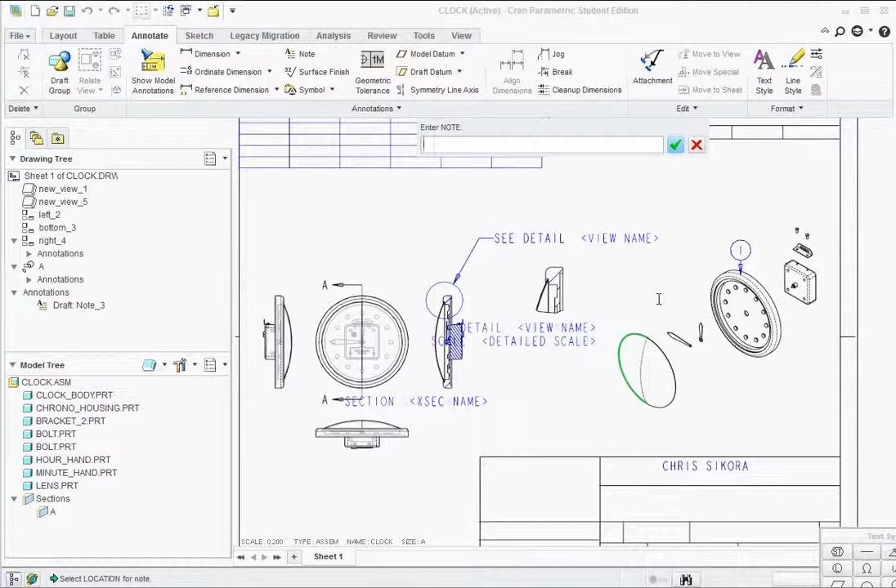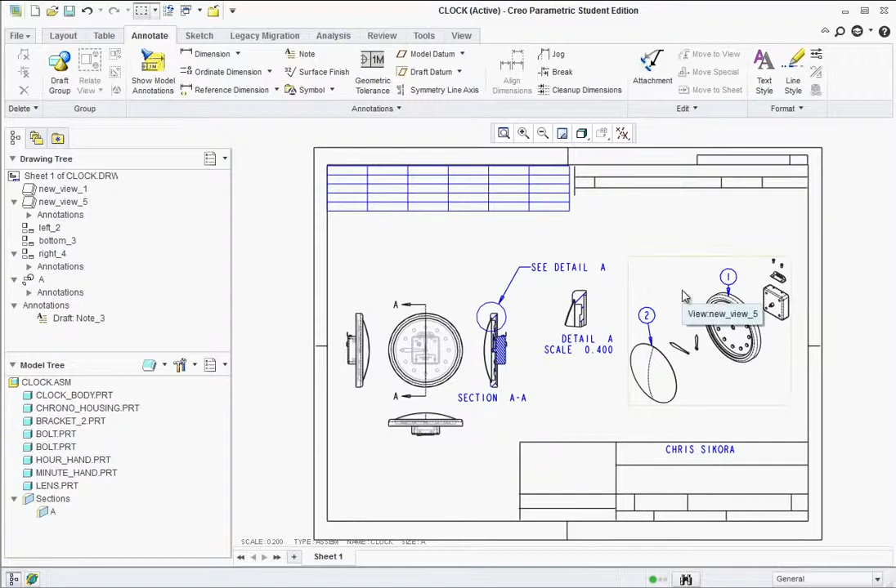Alright, at this point you just want to verify by looking at your test that it looks the same. As you can see, we have all the components - the detail view, section view, front, left, bottom. There's the bill of materials, and all the balloons are there with the name. Then just print that out.

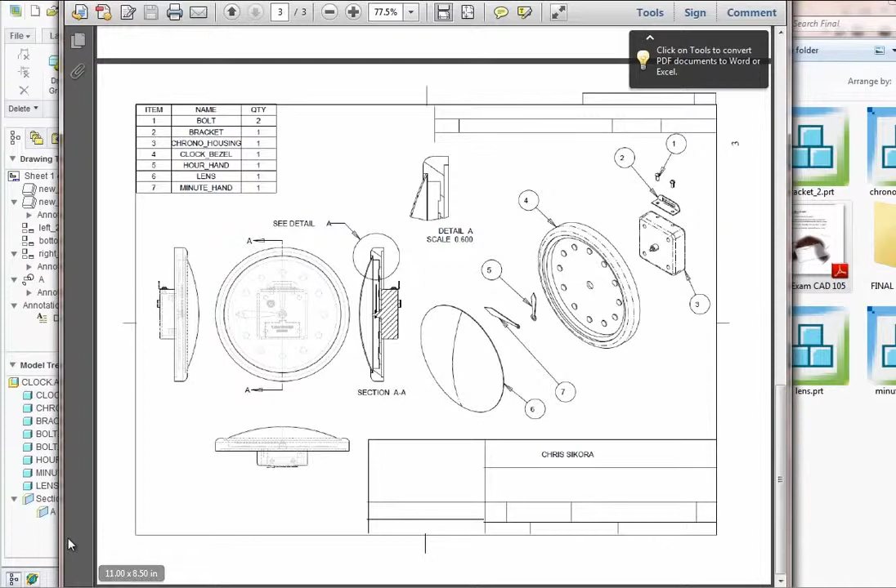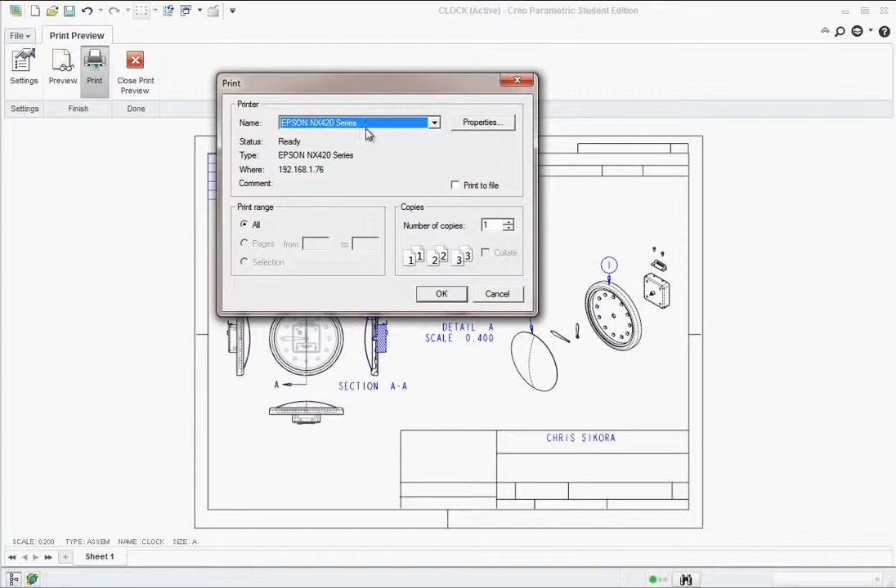So you go up here to File, go to Print, and you could do a print preview just to make sure it looks good. Then hit Print, and here you'd be able to select the ATC 208 LJ 5200 and hit OK. And that completes the final exam.